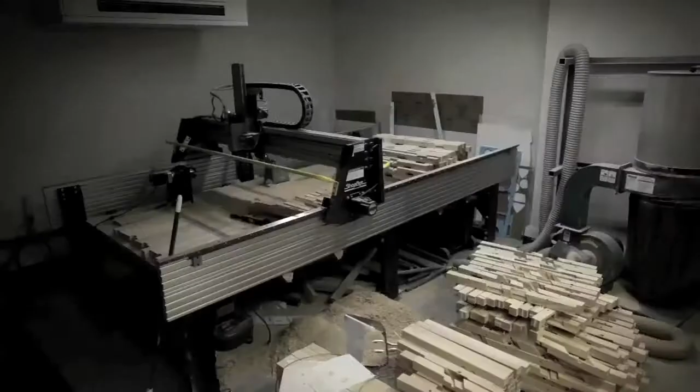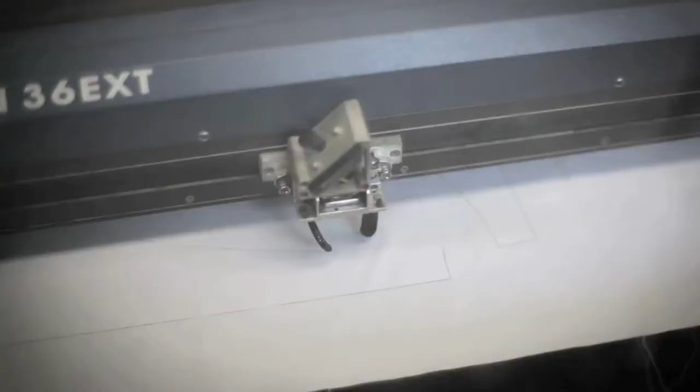Well, MIT is a very different kind of institute. Instead of becoming the recipients of building industry culture, we can now change the building industry by the kinds of experiments we're doing in school. MIT has a variety of departments that are so powerful that they have the potential of radicalizing what we do in design and in the architecture department.

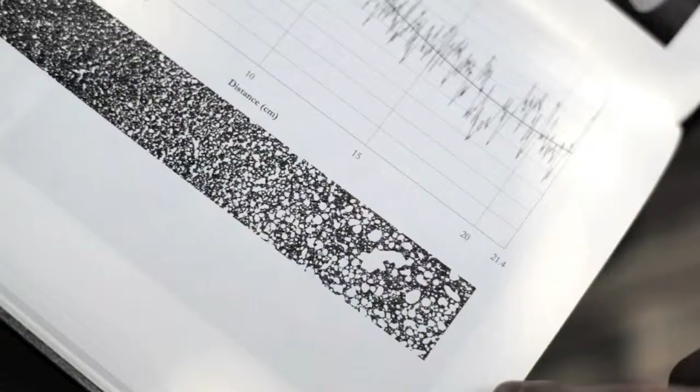Even the way that we've structured our curriculum around workshops and other kinds of collaborations in a way foster and encourage this kind of cross-disciplinary platform. So we're situated perfectly for the kinds of things that only MIT can do.

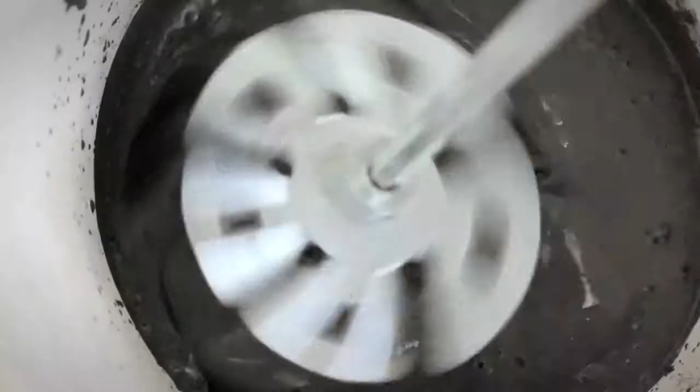The invention of human artifacts of any kind always consists of three elements: the geometry, the process, and the material that constitute that artifact. It's very clear that new materials engender new forms, and architectural design benefits from addressing, applying new materials in an informed way. The Emergent Materials Group and the Urban Metabolism Group share a central interest in materials for the built environment. Lately, we've been working a great deal in the area of foamed materials, especially foamed cements and concretes.

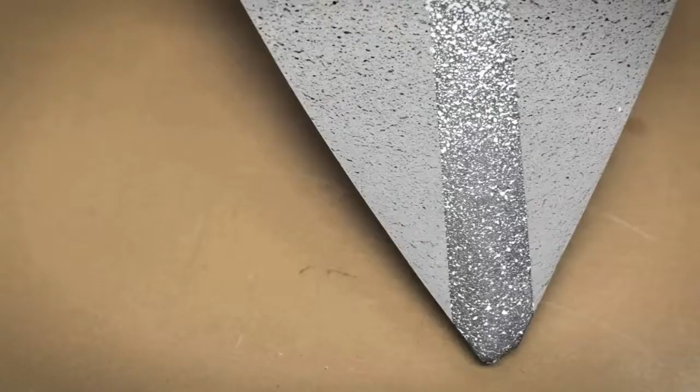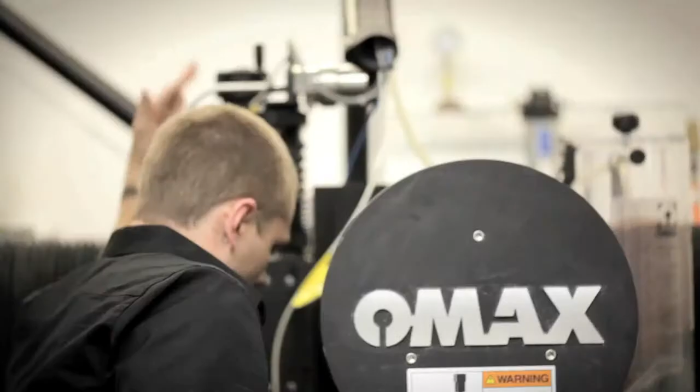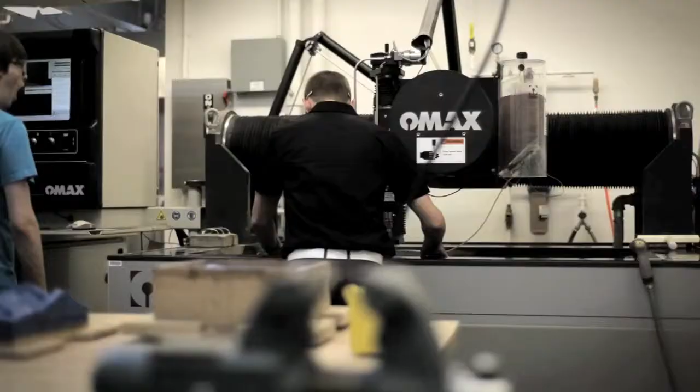So typically, beam and bending is going to have the greatest amount of stresses on the top and bottom, so we can reduce the amount of material on the interior of a beam. The work really tries to address that there's two main paradigms throughout almost every industry. The one paradigm is what can you design, what can you compute or analyze, and the other paradigm is what can you physically construct or what can you build.

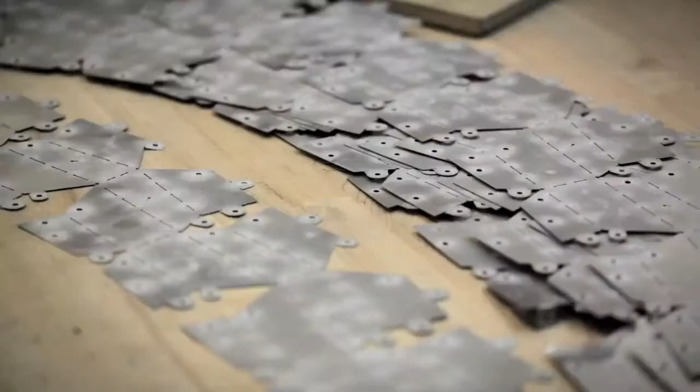The work really tries to traverse all scale lengths. It tries to work from the nanoscale, which is traditionally where we see self-assembly in biological examples, chemical examples, and it tries to bridge that and say, can't we use this phenomenon of self-assembly as a new paradigm for building things at large scale?

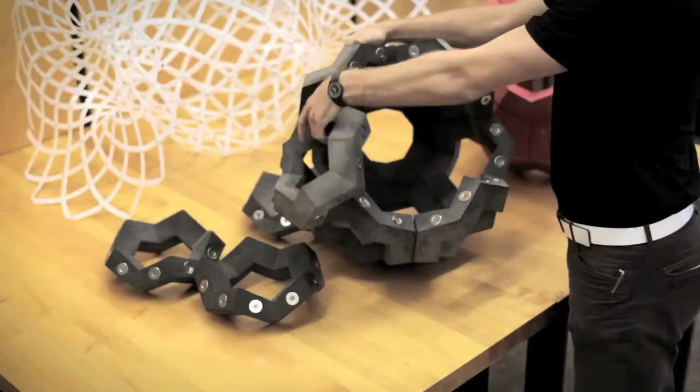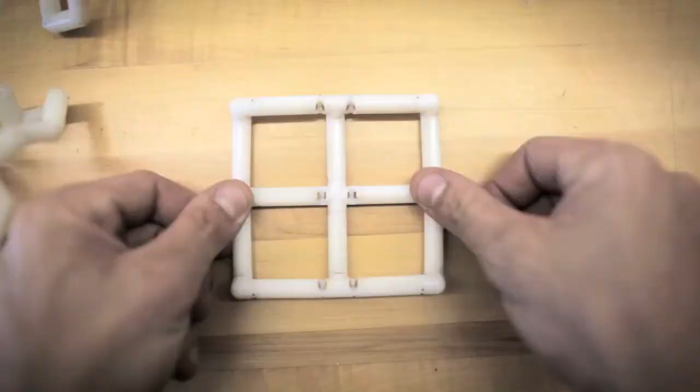We work with any type of material, synthetic or natural materials, and really try to design specific geometries that have materials in mind. And when you design those two together, they can respond to energy. And the energy sources can be heat, shaking, gravity, pneumatics, electronics. So you can use any type of energy. And when you mix that with the geometry and material properties, then they can respond and they can change state. Primarily, it will first be applied in extreme environments, scenarios where it's difficult to build.

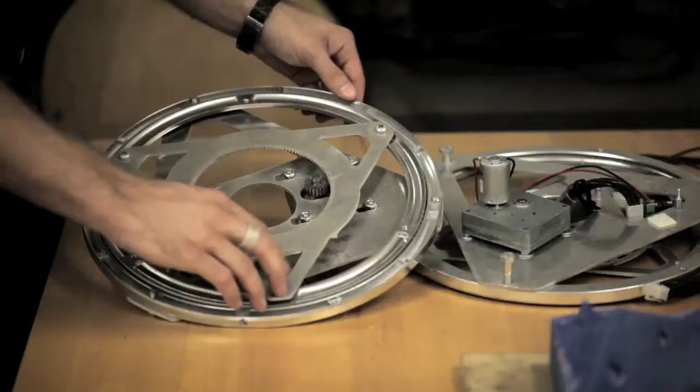The research and the practice is really about cross-disciplinary collaborations between designers, scientists, engineers, working on this phenomenon of self-assembly, discovering where we find it naturally, where we can use it synthetically, and trying to apply that at all different scale lengths.

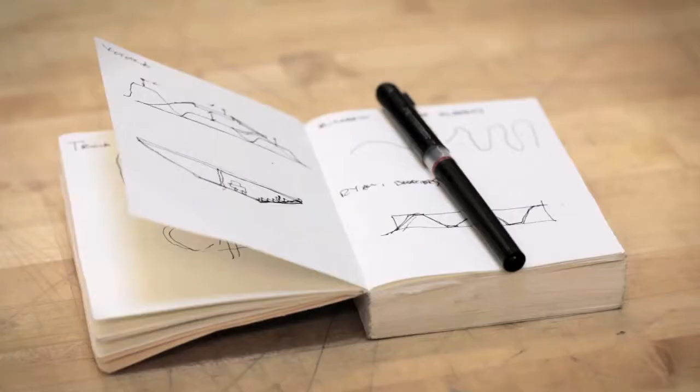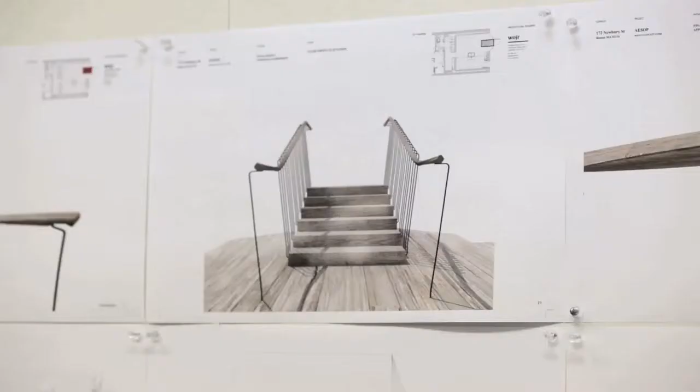The focus of our work, at least at this smaller scale, at the scale of, say, art installations or retail, we leverage CNC fabrication methods, but not as a way to exude their prowess necessarily, but more as a way to help us get at a particular formal agenda. An installation called Totems, which in a way is a kind of proto-architecture, not quite architectural, not quite sculptural, but I think that it offers a kind of proposition to each of those disciplines.

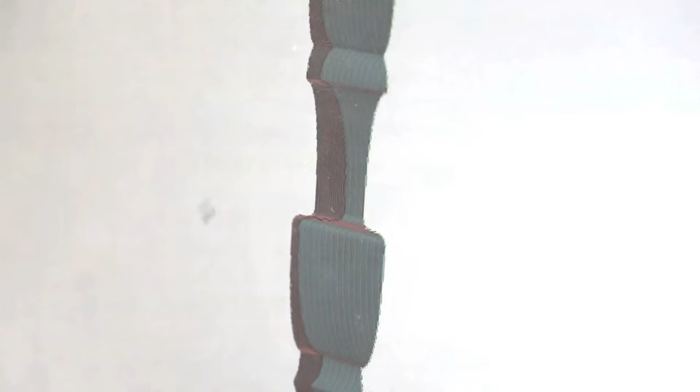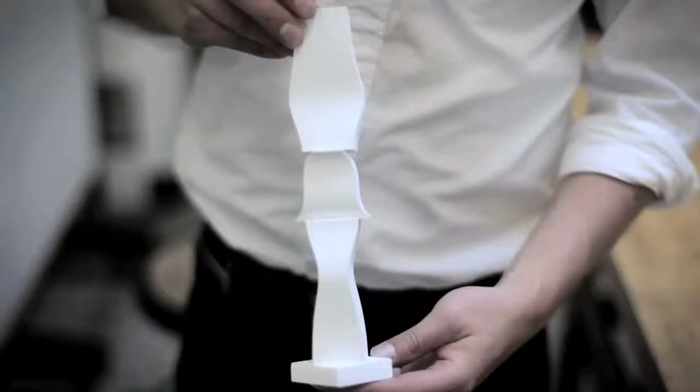We do a lot of testing via 3D prints. A lot of the formal investigations for Totems specifically happened in 3D prints. We did maybe 30 to 50 3D prints of the totems as a way to understand how the light and shadows were working and how best the anamorphic effects were working before we went to the large format wire cutter.

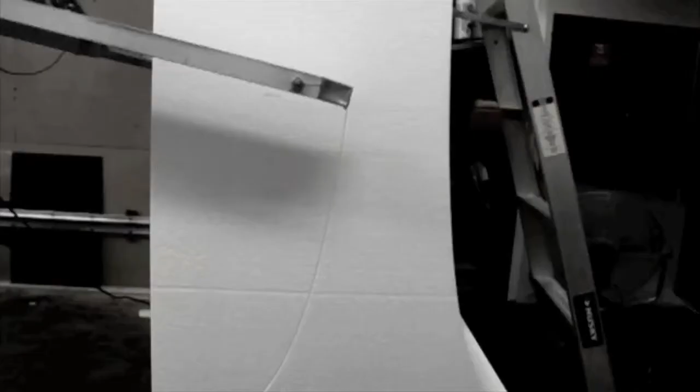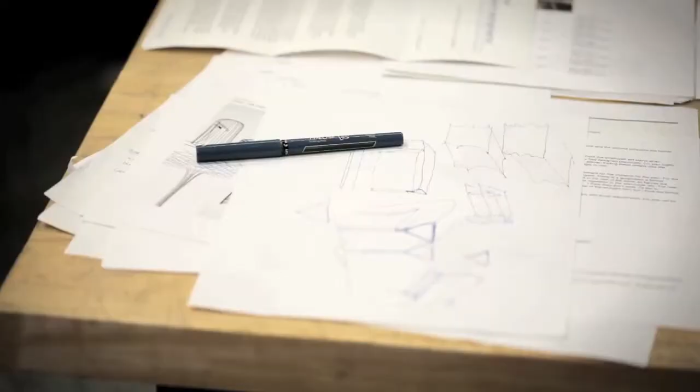In terms of collaborations, some of those happen here at MIT. Joel Lamere and I are developing an installation now, which is an anechoic chamber, and the anechoic chamber uses industrial felt both on its exterior and as a way to absorb sound on the interior. I'm bringing a kind of disciplinary or formal or geometric interest on the one hand, also a certain set of specialized understandings of the behavior of these sheet materials on the other.

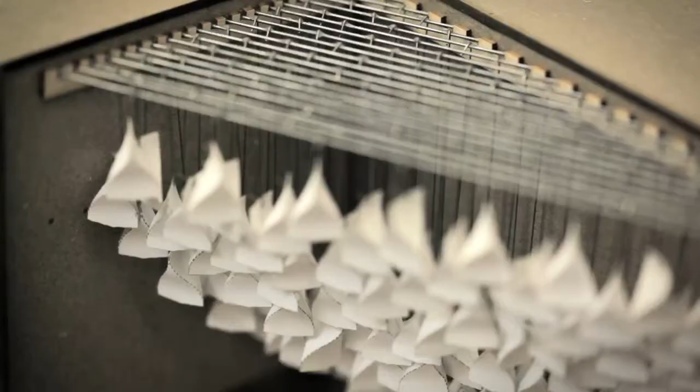So my architectural interests are really broad, but in terms of my current research preoccupation, it's about material geometry, specifically sheet shapes or sheet material geometries, how they bend, stretch, stack, fold. But obviously understanding sheet materials is really critical to architecture. It's a sort of a long-standing discourse on sheet materials in architecture, in part because it's so ubiquitous in conventional construction.

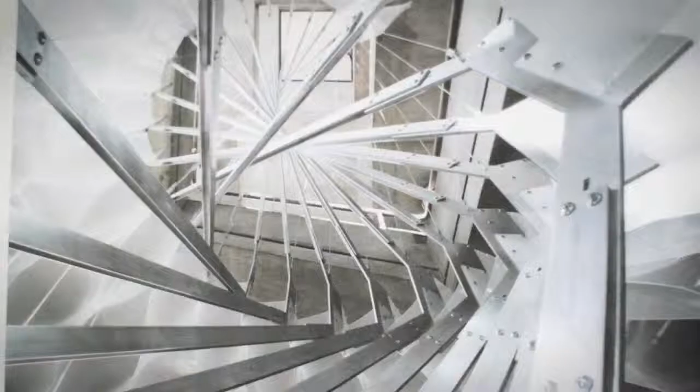So everything including plywood, sheet metal, steel, aluminum, plastics, all of these have to deal with the developable surface geometries, which is to say sheet shapes generally. And so expanding the total set of understandings about sheet shapes is a totally and kind of obviously worthwhile architectural undertaking. These installations attempt to jump from the scale of the paper model to the scale of the architectural space at the very least.

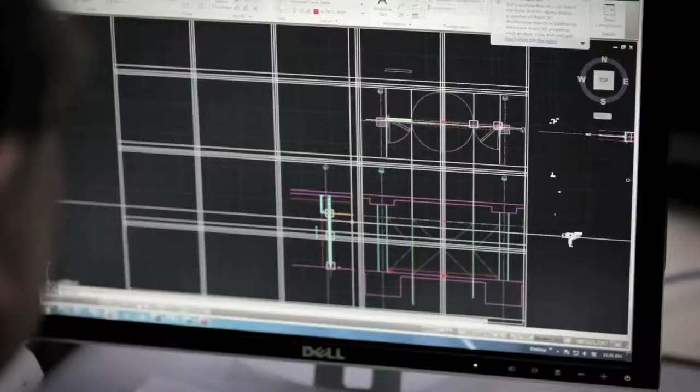Well, over the past 20 years, first as Office dA, now as NADAAA, we've identified 2 or 3 areas of focus. The first has been to look at materials and their behavior as a point of departure for many of the architectural experiments we do.

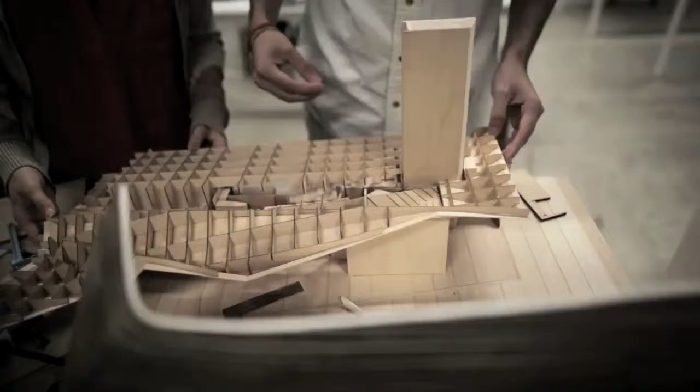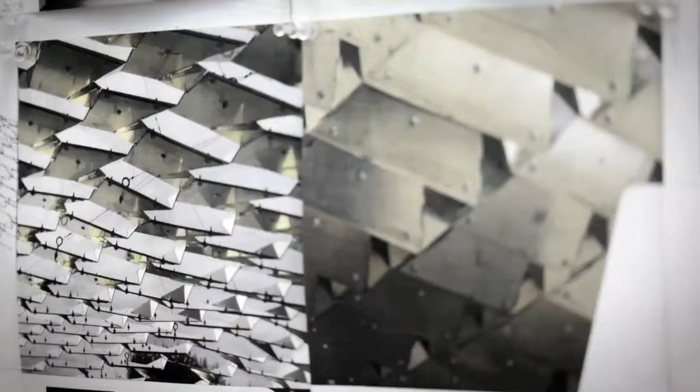The second area is to recognize that materials don't have an endless limit. Everything comes in modules, in sheets, in blocks, in bricks, and that without aggregation, there's no way of beginning to figure out how construction works in general. So the detail of bringing things together as a point of departure has been another central focus.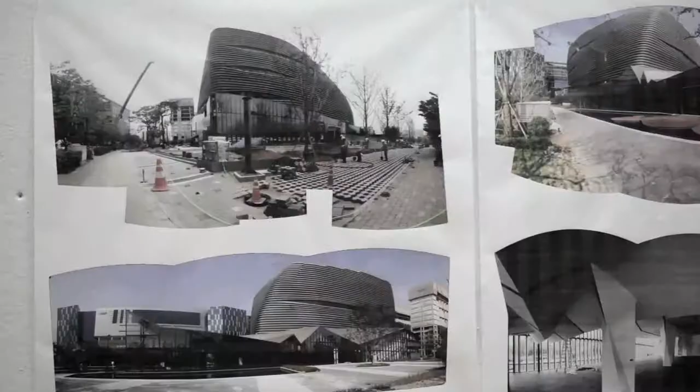So this has been a kind of point of revolution for a range of projects that we've researched and undertaken, some of which are at the scale of a piece of furniture, others that are at the scale of a building, and others that are really at the scale of urbanism.

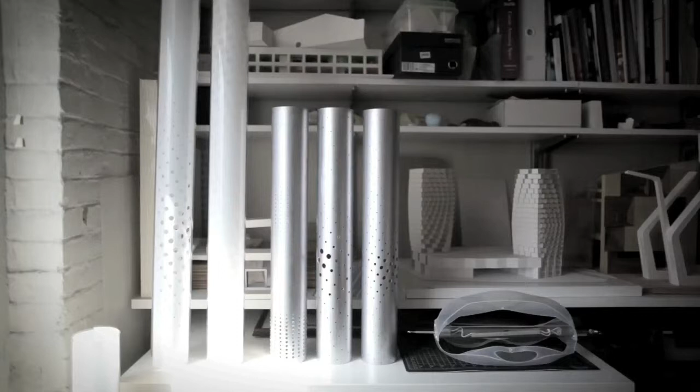One of the agendas of the studio is to create interactive architectures for public space through design and technology. And these projects can range in scale from the scale of the body, such as the Defensible Dress Project, which is a wearable architecture, which uses a microcontroller and shape memory alloys to defend your personal space,

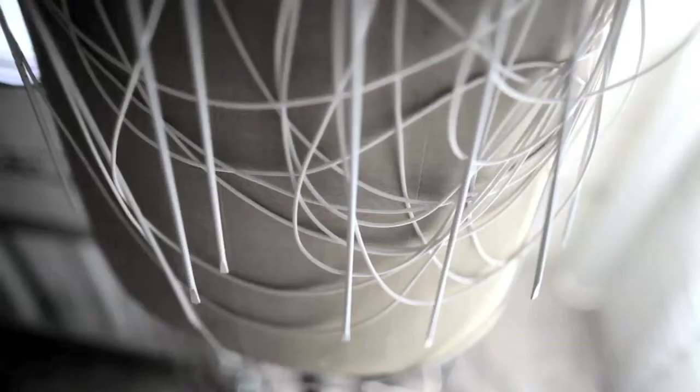to very public scale infrastructural projects, such as our proposal for the Audi Urban Futures Initiative, where we're speculating on high-speed regional infrastructure and transformations in the city around issues of mobility for the year 2030.

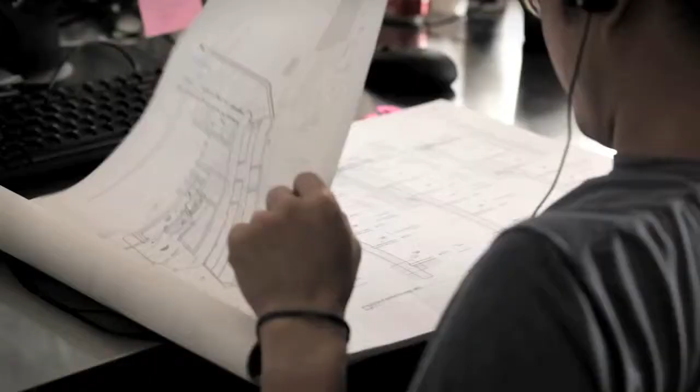It seems now more and more necessary that our environments have to become smarter, more responsive, and more flexible. The way in which architecture is made needs to be completely rethought if we're to go beyond bricks and mortar to engage the challenges of the next century.

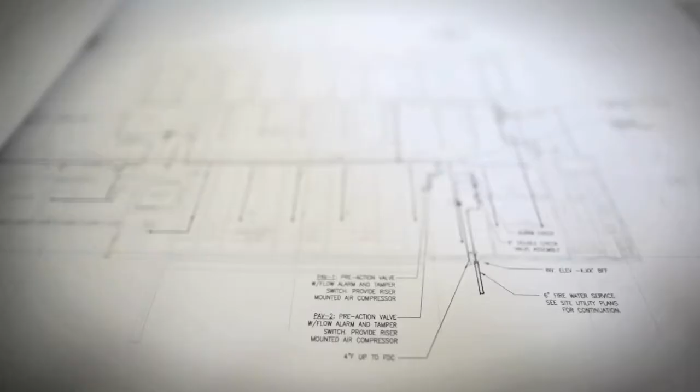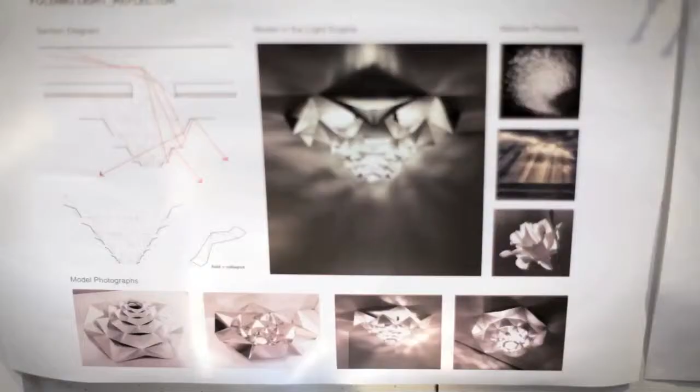My work as an architect focuses on designing architecture and urban scale interventions that engage the emergent infrastructure of our time. We're interested in how design engages that mutability between energy and matter, when materials generate energy or store it, when materials are dynamic and change state, exchange heat, produce light, or communicate information.

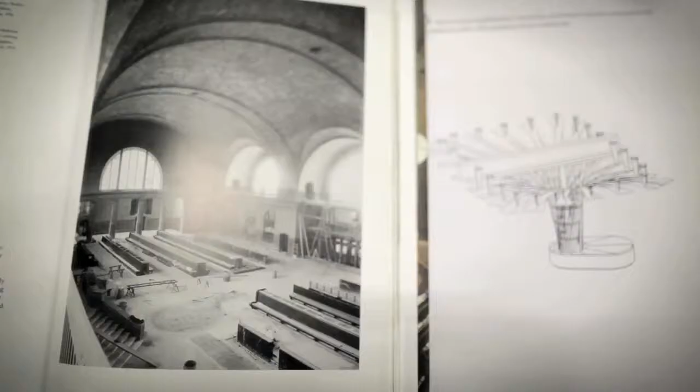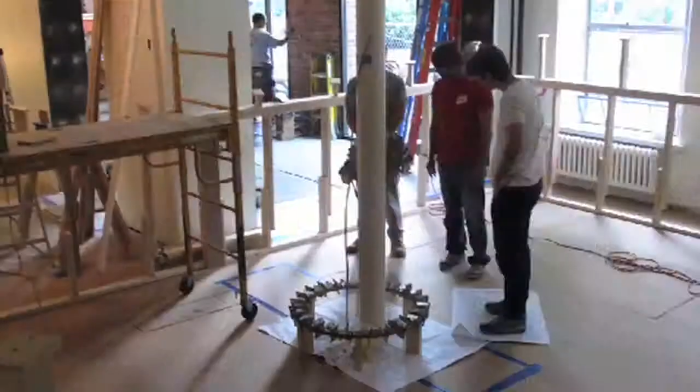The challenge, I think, for the discipline of architecture today isn't in digital fabrication, it's in material fabrication, in thinking about what it means to be material today when we move fluidly between digital and physical realms, how we use materials and not waste them, and how we form materials and how we transport them.

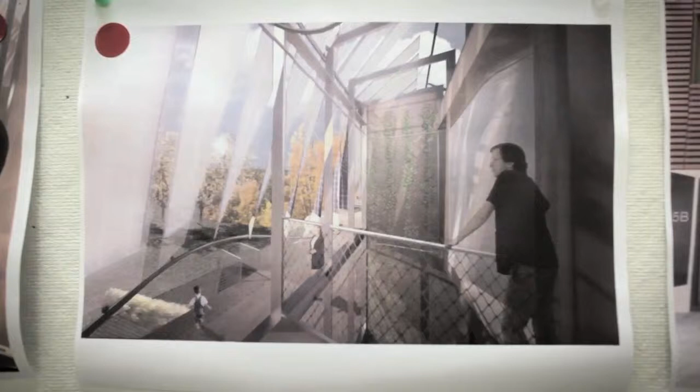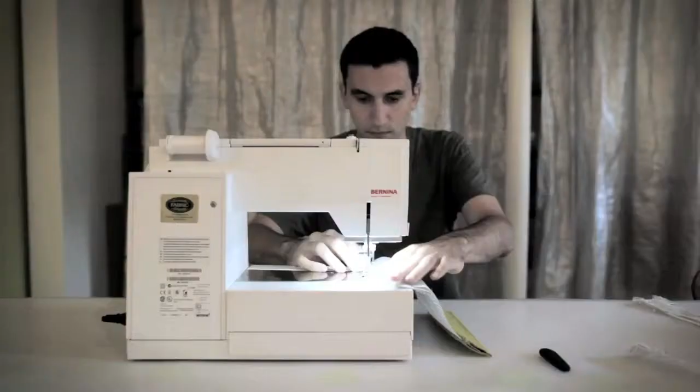If we're going to change the building industry and regenerate an innovation-based manufacturing segment in the United States, then I think we need to do this from within practice, from working with the norms of the building industry, but not settling for those norms, instead innovating to both accept and transform those standard conditions.

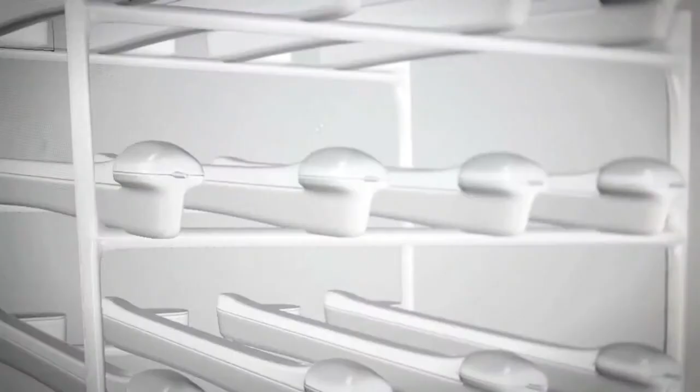I think we're pursuing several initiatives relating with computational material at several different areas. Dynamic interactivity is one with hypersurface, and we're driving that forward. Imagining actively alloplastic environments. If you like, it's a demonstration of the power of computation come real time.

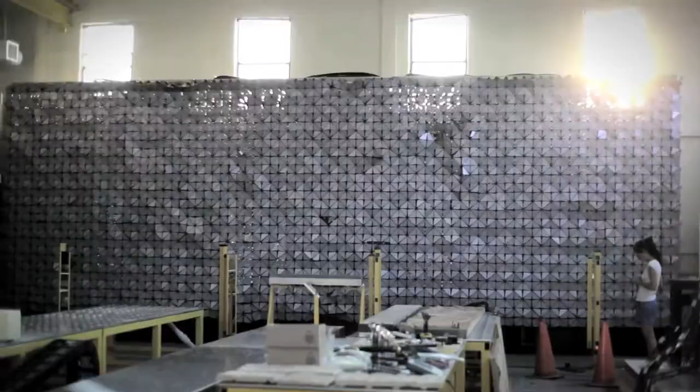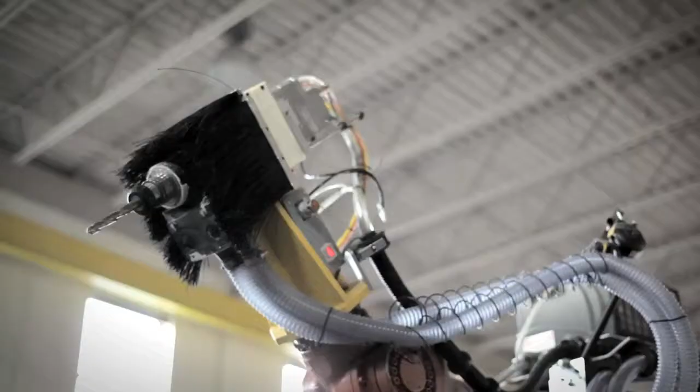Then in the robotic manufacturing work, we're looking for sort of power, information and material all coming together, but with control directly at the architect's workplace. So we're developing tools that allow architects within their native software like Rhino to pilot a powerful production machine like a KUKA robot, demonstrating, I think, what will be the future of manufacturing, which is sophisticated algorithms and modeling that link directly to sophisticated manufacturing machines and allow both new efficiencies but new versatilities, new formal complexities.

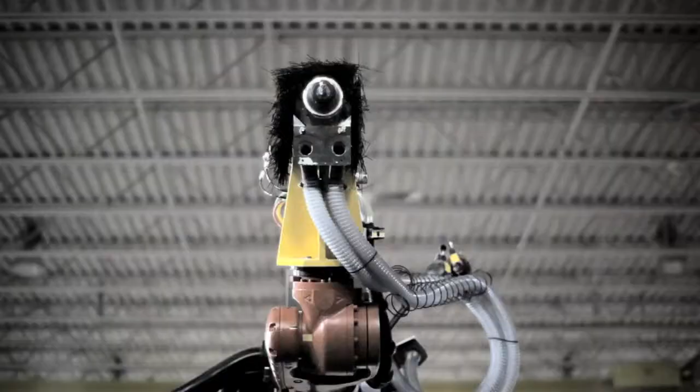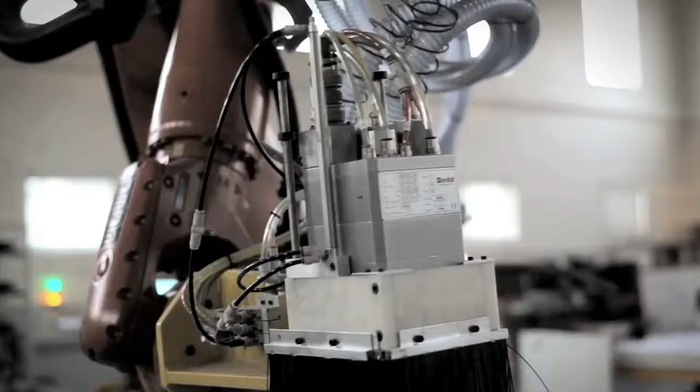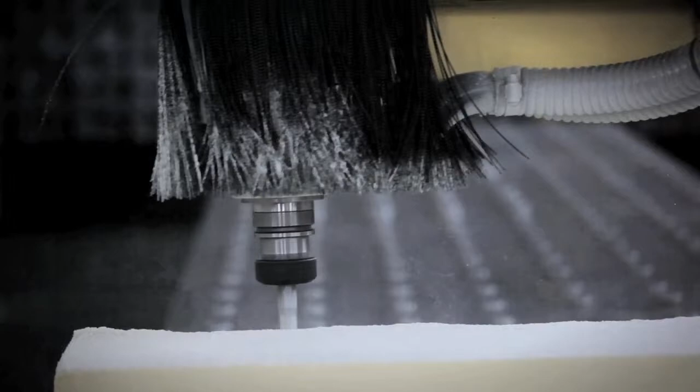I'm also frustrated by the slowness of the building industry to innovate materially. There's a fantastic amount of research in material science that's pent up and is just dying to come at a period where the sort of environmental concerns are becoming so enormous, and the challenge of building the developing world is so extraordinary that they're necessary. CAD/CAM meets material science like composites, I think, is going to breathe a whole new life into the architectural and building industries. So.